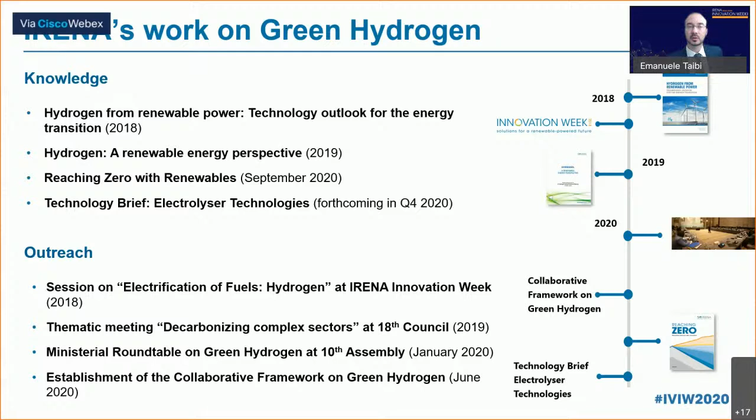From that experience, ministers asked us to continue the dialogue, and because of that we established a collaborative framework on green hydrogen in June 2020. We are now opening this up to participants from the private sector, academia, other partner organizations, and so on, making it a very open platform. This is happening as we speak, and of course it's an ongoing effort. Next slide, please.

Increasingly, the message here is that the closer we get to zero, the more we will need to produce hydrogen derivatives to be able to decarbonize the so-called hard-to-decarbonize sectors. Next slide, please.

Just a quick overview of the challenge in terms of the economics of hydrogen. Today, with some of the best renewable resources, say $40 a megawatt hour, and current cost of electrolysers, in some places we see better prices already today. This is from one year ago: we are still at about $3.50 a kilogram, which doesn't make it competitive with alternatives from fossil fuels.

However, with the cheapest renewable resources we're seeing today, $20 a megawatt hour, and we've seen auctions at 15 and below these days, from $20 and below it starts to get very interesting. So what we need next to really get a strong, compelling economic case for green hydrogen is to reduce the cost of electrolyzers.

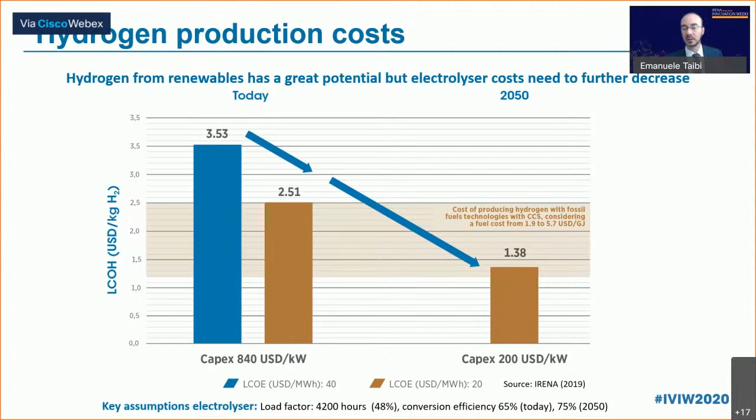Next slide, please. Just to give a bit of perspective on how important electricity price is: in this case we fixed the cost of electrolyzers to a very ambitious target. We're not there yet, but we estimate we might get there in a decade, which is fairly good given the pathway to zero requires hydrogen to come up to speed in the next decade. This is the challenge we're trying to tackle today: how to get from zero to a very significant market in 10 years by 2030.

So in this case you can see that cheap electricity is a prerequisite to getting a competitive hydrogen level. To go below $2, the only chance is to get at least $20 a megawatt hour and below in the price of electricity. So only the biggest, best renewable resources can achieve that.

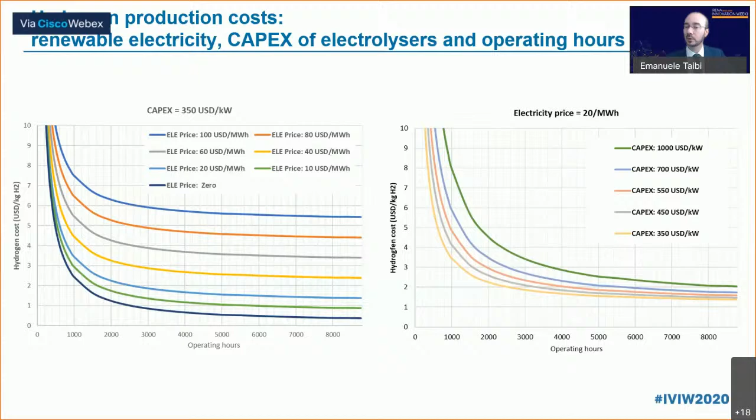Next slide, please. Less sensitive, but assuming we have this $20 a megawatt hour, then what we need to do is further reduce the cost of electrolyzers to get below $2 and well into the territory of blue hydrogen and other alternatives. What you see here is that it's less sensitive than electricity, but equally important to scale up the production of green hydrogen through more affordable electrolysis. Next slide, please.

So this is our forthcoming report on the subject.

For those of you not familiar with electrolyzers, essentially these are machines that can split water into hydrogen and oxygen. Very well established technology, deployed for over a century for different purposes, now producing green hydrogen for energy use.

What we're doing as we speak is tracking projects that went from few kilowatts or hundreds of kilowatts a few years back, with few exceptions, now with announcements moving from hundreds of megawatts to gigawatt scale. We're hearing new announcements every day, and more of these are reaching the gigawatt scale.

So what we need to do in parallel is get R&D to give us the next generation of electrolyzers while we scale up what we have today, which is already quite good. You will hear from our excellent panel to discuss that in a minute.

Two key points: I think trade-offs are very important. Durability, efficiency, and cost have a trade-off. If you make it more durable, you might end up making the electrolyzer less efficient. Overall, you need to balance this to get the minimum cost of hydrogen, which is the objective.

Of course, an electrolyzer can be looked at from the perspective of a cell or a plant. When we look at a plant, there is more than just the electrolyzer stack inside — there's much more. Our panel will talk about it, but I'll also have one slide about this.

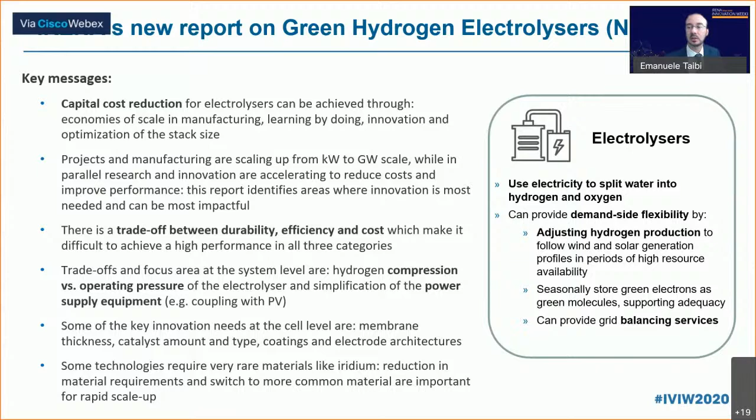Next slide, please. So this is, in brief, a very simplified view of an electrolysis plant.

You have the stack, you have electricity from renewables coming in, you need a transformer, you need a rectifier, and then out of the stack you get the hydrogen and the oxygen, and you need to compress it and clean it and feed it into either a pipeline, storage tank, trailers, or ships. It really depends. And of course you need feed water supply.

This is not an issue where there is even seawater. Even if we consider desalination, it's not a major expense, yet it has to be a significant volume of water accessed to be able to produce hydrogen at scale. The cost is about 50-50 between the balance of plant and stack components, with different potential for cost reduction.

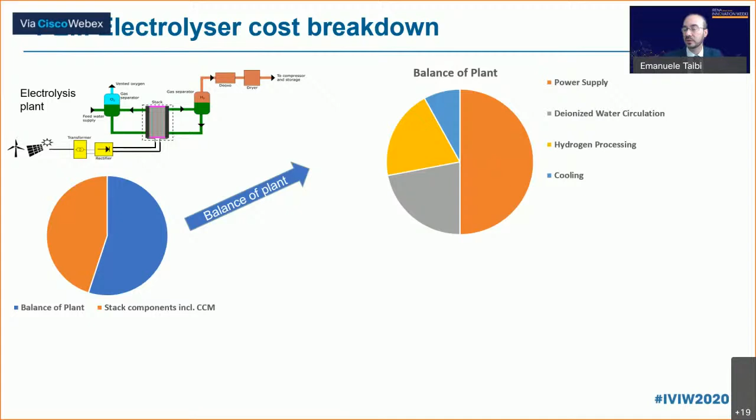Next, please. So the balance of plant — there is significant scope for reducing the cost of power supply. This is power electronics, and we've seen a dramatic reduction for solar PV. We will probably see the same here.

Next, please. The core of the plant is the cell stack, and this is where it gets quite technical on electrochemistry. Important to note, we have several components, and parts like bipolar plates, which are not very well known outside of the industry, take a significant part of the cost.

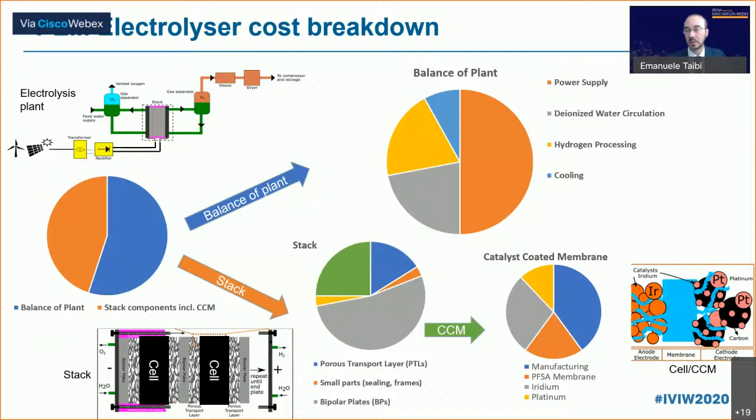Next, please. Then the very core, the catalyst-coated membrane, is where we see materials like iridium and platinum — here I'm talking about PEM, just as a practical example. This is where the rare materials are typically situated, and where some potential cost reduction can be tackled, but this is yet 25% of the stack, and about 10% of the total of the plant. Next, please.

So let me conclude with what I mentioned at the very beginning. We established a collaborative framework on green hydrogen based on the call at the 10th assembly from our members to continue the dialogue between public and private sector. We have an excellent dialogue set up for today as well. The idea is that this is very much appreciated by governments to get insights and views and perspectives from the private sector on how to scale up, and at the same time suggestions on how to make policies and regulations align with the objectives we are seeing coming up in more and more hydrogen policies around the world.

We have a few elements that have been identified as priority: the knowledge sharing, collaboration with hydrogen initiatives, and we're very pleased to collaborate for the time being already with IPHE and the Hydrogen Council, which respectively would be moderating the next session, and they are partners for the session and the next keynote today. The nexus between hydrogen and renewables is clearly IRENA's mandate, and of course, knowledge about all steps of getting hydrogen from production to consumption are very important, as well as standards and regulatory framework and best practices.

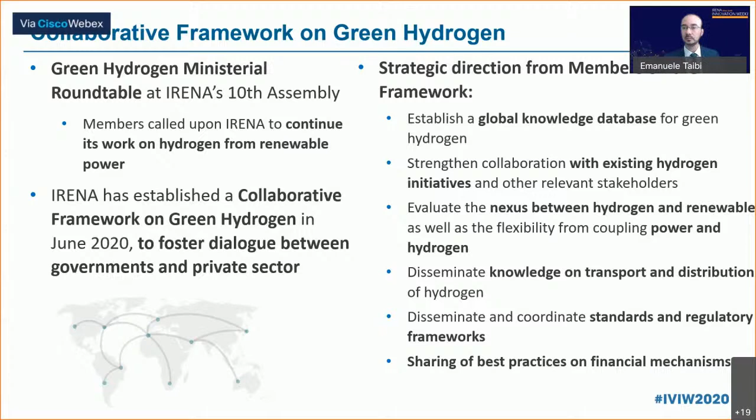Thank you very much, Emanuele. I thought that was very clear, and I hope people got a good sense of the topics that we are talking about here today, in particular the critical importance of driving down the cost of electrolyzers as part of driving down the cost of green hydrogen production. So we are going to dive into that topic in our next panel. We have an excellent lineup of speakers who, between them, have a wide range of expertise on the topic.

This next panel is called Electrolysers Production. It's moderated by Tim Carlson. Tim is Executive Director of the International Partnership for the Hydrogen Economy, IPHE. So Tim, can I hand over to you, and can I ask all the panelists to please turn on their cameras, and Tim will introduce you. Tim, over to you.

That's great. Thank you very much, Paul. As Paul said, I'm the Executive Director of the International Partnership for Hydrogen and Fuel Cells in the Economy, the IPHE Secretariat, and it's my pleasure to moderate the panel on electrolysis for green hydrogen production. As Paul suggested, please send in questions via the chat or the Q&A panel, and hopefully we'll have time to address some of those questions. I'm going to provide a brief bio introduction. I understand the material is also available on the site, and then we'll walk through each of the presentations and then do Q&As at the end.

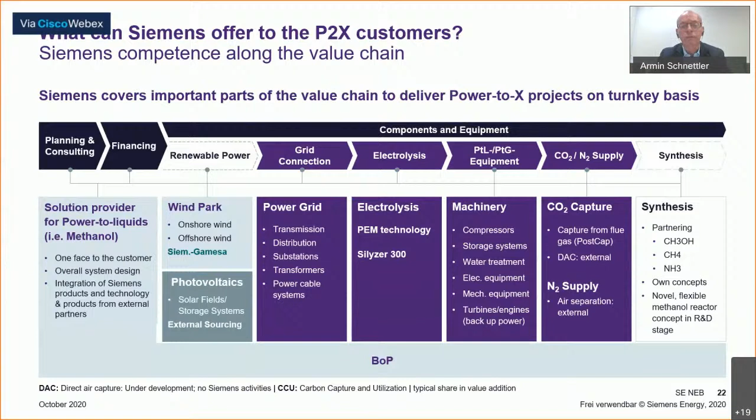In the later sessions, we will talk about ammonia, and then we have, of course, the next stage, right? How to supply the nitrogen, how to supply maybe the CO2 and get the carbon monoxide out of that, and then the synthesis. So we partner for that. We are quite strong in the center here, and this is really where our focus of our business is. Maybe last slide.

Two parts why we believe, and our customers believe as well, why we are a valuable partner. This is maybe the sales pitch, right? Necessarily required here. We have right from the beginning focused on industrial scale electrolyzer systems and plants. Although there is not really a standard in the market, we get requests for, say, 10 and 5 and 15 and 20 and 50 and 150 megawatt ranges.

We need to be careful that we do not over-engineer everything and reinvent the wheel all the time. So what we are doing is we have pre-engineered and prefabricated packages. And if you would like to get, say, 100 megawatt, then it is 2 times 50, because 50 megawatt is pre-engineered. We have the basic engineering, etc. And the next one, of course, the gigawatt range is somehow different. Of course, then we do it in a slightly different way.

So this is important. And the final topic I would like to mention here before stopping is, in order to reduce the overall cost over, say, 10, 15, 20, and 25 and more years of operation, you need to have a digital twin of the electrolyzer, of the system, in order to operate the overall plant, depending on the input factors, which is, of course, availability of low electricity prices, the expected output in, say, hydrogen demand in tons at the given expected price or cost, and, of course, maintenance and service intervals you need to consider here, because availability is key.

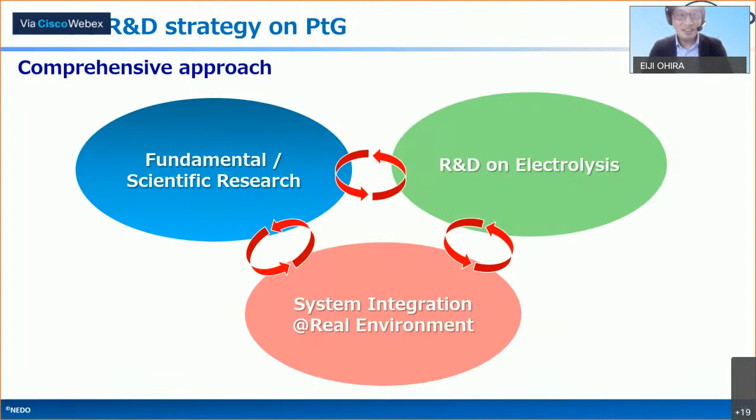Okay. This is an approach. The fundamental research is to understand what is inside the reaction of the electrolysis. We did several approaches: electrode-electrolyte interface analysis, bubble behavior observation, accelerated degradation protocol, and reverse current behavior analysis should be important for us. We integrated this kind of analysis technology to develop a platform to understand the electrolysis itself, and we feed back this information to the material or CCM development.

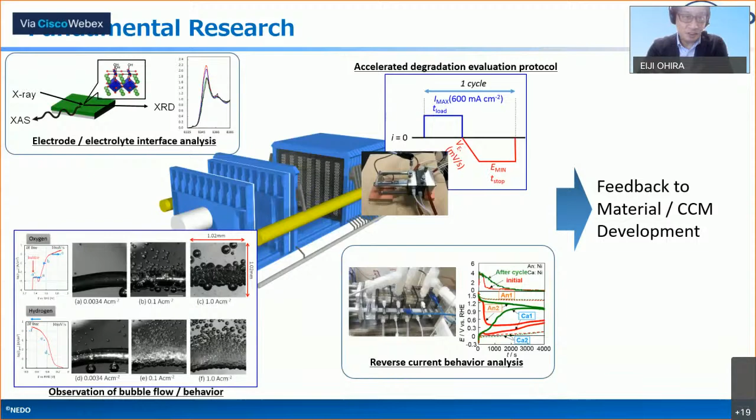This is our approach for developing the electrolysis technology. Now we are focusing on alkaline electrolysis and PEM electrolysis in the short term. The top slide shows the Asahi Kasei large-scale alkaline electrolysis, 3 square meters wide and 1 stack. In the right graph, the top blue line is input from the wind turbine, and the bottom red graph shows the cell voltage of the alkaline electrolysis. You may see good load following and good response even in alkaline electrolysis. So we decided to utilize this alkaline electrolysis in power-to-gas systems.

The bottom photo shows our new technology, a hydrocarbon membrane for electrolysis developed by Toray Corporation. In the middle graph, you may see good performance compared to Nafion as current PEM membranes. After the 25 kilowatt test, we are going to move to scaling up this technology.

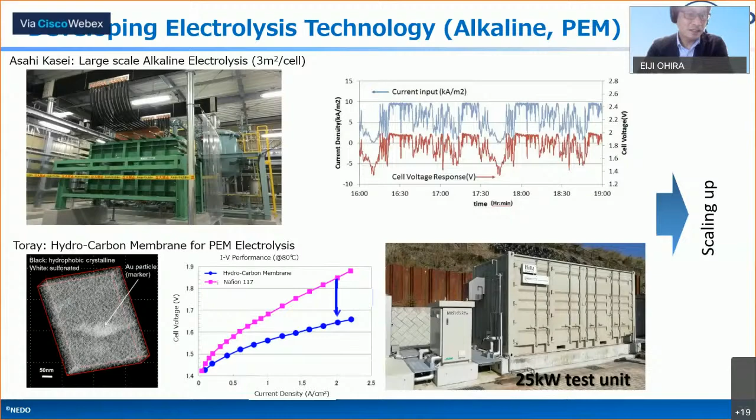Now NEDO has been conducting two types of large megawatt-class power-to-gas projects. First, we started the kilowatt class around 2015, and after closing that project, we moved to the megawatt class. The left figure shows our power-to-gas project in Fukushima Prefecture. We introduced 10 megawatt alkaline water electrolysis with 20 megawatt PV. We try to produce green hydrogen and also provide grid balancing with the dynamic operation of the water electrolysis.

Our first plant was to provide green hydrogen to the Tokyo Olympic Games this year, but unfortunately it's postponed to 2021. Maybe I'm happy to introduce this technology for next year's Tokyo Games. Later on, we also developed a 1.5 megawatt PEM water electrolysis power-to-gas plant, and we utilize large-scale metal hydride hydrogen storage combined with compressed hydrogen storage.

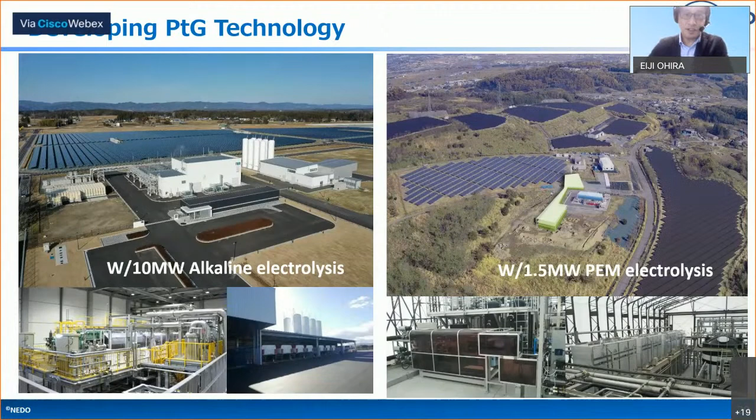But we recognize there are a lot of challenges to realize power-to-gas with electrolysis technologies. We need to improve the electrolysis technology itself. Japan has cost and efficiency targets for 2030. We need to improve efficiency and durability under dynamic operation conditions, which are very close to power-to-gas conditions, and performance: hot and cold start, ramp rate, response speed. Scaling up should be important. Next-step novel materials to reduce the cost or increase efficiency should be required.

Power-to-gas is a developing system technology. Japan tries to commercialize this system by around 2030. We think about total system optimization, including the balance of plant. We also developed energy management technologies based on data for weather forecasts and market conditions, etc. Operation and maintenance cost is a big part of the hydrogen cost, and we try to reduce it. Most important is the business model and market mechanisms. We didn't have any market model in Japan, so we try to develop this kind of model.

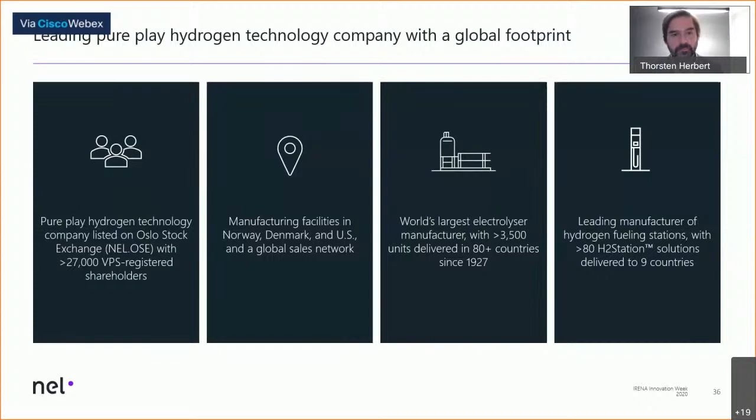Looking into the manufacturing facilities and also pointing out one very interesting fact: if you look at the PEM electrolysers, we are now in the US at 40 megawatts per year capacity. But the highlight, and I will dive a bit deeper into that in one of the later slides, is that we are now preparing the plant in Norway for an output of 500 megawatts per year by end of next year. So this is currently in process.

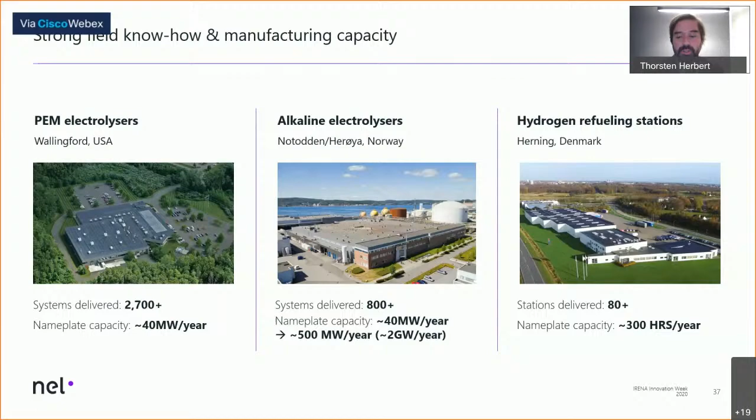And also a very good perspective is that this location, which we also see in the picture, is already capable of being expanded to 2 gigawatts per year just by quadrupling the equipment. And then the refueling stations in Denmark, we are ready to build up to 300 stations a year. Next slide. So, 2 latest developments.

Again, one highlight for us, and that also leads me to a comment on one of the earlier presentations, the introduction of Emanuele, looking at the scenario with $350 per kilowatt, with the perspective to have this huge capacity and fully automated manufacturing principles in place soon. In our latest deal, we already sold our alkaline technology in this price range.

So if we anticipate what we can gain from this upscaling in manufacturing capacity, we are already there. As I said, this will start test production mid next year and will be ready for the whole capacity end of next year. And just by multiplying the lines, we would be able at this location to ramp up to 2 gigawatts per year. Next slide.

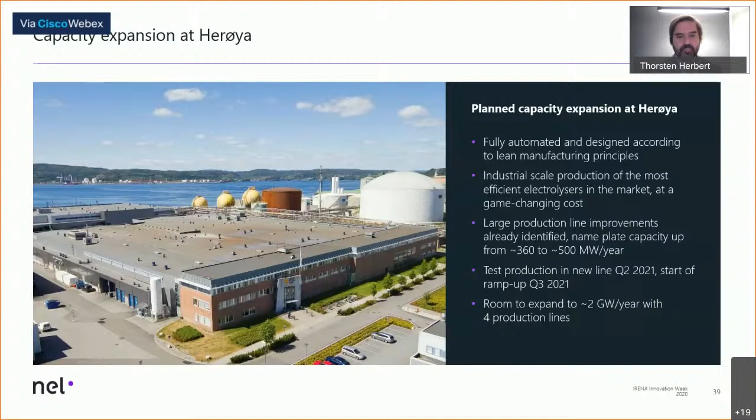Looking into the technology, we lately got some key R&D grants, 2 quite large ones for our R&D activities, addressing both technologies we are offering. On the one side, the alkaline electrolyzer: we have an R&D grant here in Norway for improving the next-gen alkaline electrolyzer, also at pressure.

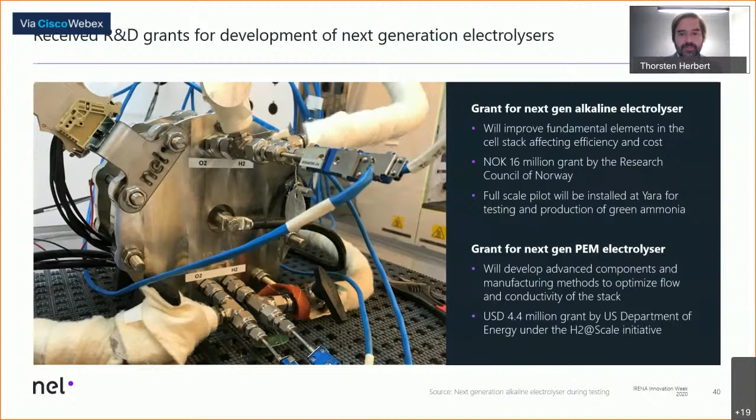And then on the US side, a quite significant grant to further develop our PEM technology with regards to components, manufacturing methods, but also optimizing flow and conductivity of the stack. Next slide and next slide.

Quickly looking into the European momentum. I think you're all aware that at the beginning of July, the European Commission came up with this very ambitious strategy. We are talking 40 gigawatts installed electrolysis capacity in 2030, but already 6 gigawatts in 2024.

And this is one of the messages I want to bring across: this should be our main target. We should, in Europe now, really focus on these 6 gigawatts in 2024 and come up with a roadmap. What we need to do, what we need with regards to policy measures, and looking into the next slide.

We already see not only on the Commission side with the 40 gigawatts target, but also ambitious targets of the member states. But still here we are roughly at half of this 40 gigawatts, what the member states pledged so far.

One other thing before I come to the end is that obviously, and I put the logos here, we already have funding mechanisms in place to come to this milestone of 6 gigawatts by 2024. But I think the key, and this is here in my subtitle, the key now is really that we as an industry cooperate, that we coordinate each other to, in the most efficient way, utilize these funding schemes and also address the additional needs we have.

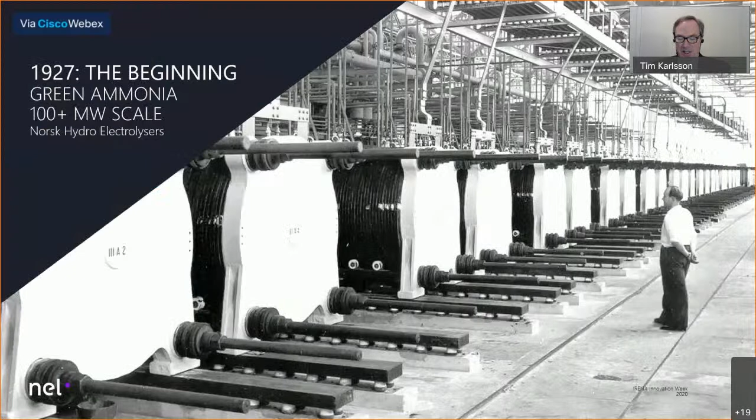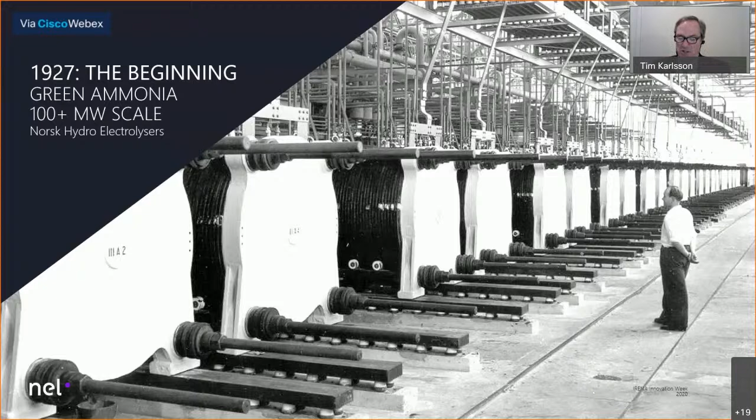I'd like to move on then to our next presenter, and that is Denis Thomas. Denis is leading the business development group of the activities for water electrolysis at Cummins, which acquired the activities of Hydrogenics in 2019. Denis represents Cummins in several EU associations, including Hydrogen Europe and Wind Europe and other organizations that are looking to hydrogen to play a significant role. He is also a mainstay in hydrogen-related policy discussions across Europe. So, Denis, please, you have the floor.

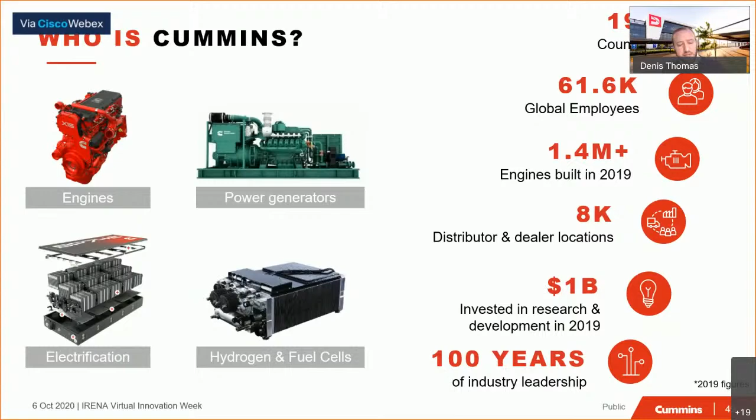The activities of Cummins in the field of hydrogen are quite wide. We have technologies in the field of electrolysis; I will present them in a minute. We also have technologies in fuel cells and in hydrogen storage tanks. The idea is to be able to offer complete systems, both on the electrolyzer side and on the fuel cell powertrains for mobility.

Among those acquisitions, there was the acquisition of Hydrogenics, which was the major one, including electrolysis and PEM fuel cells. There was also, a couple of years ago, the acquisition of the solid oxide fuel cells of General Electric. And then there is a joint venture with NPROXX in Germany on hydrogen storage tanks. The aim is really to be a top performer in industrial hydrogen generation, but also in power to X, and I think that's the focus of today's discussion. On the mobility side, our focus is mainly on heavy duty mobility, like trucks, trains, buses, etc. Next slide, please.

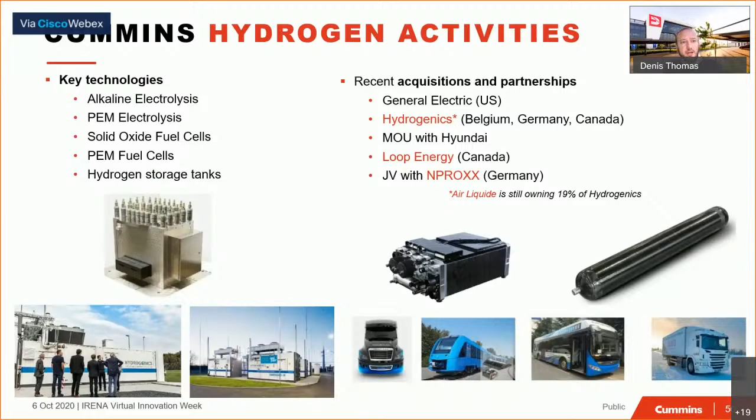On the PEM technology, which is really the focus of my presentation today, we've been developing this technology for over the last 10-15 years. We have already commercial products at 2.5 megawatts, which are containerized systems. We are currently developing our product towards 5 megawatts and bigger. In this case, we will not follow the containerized turnkey approach, because we believe that for a bigger project there is a need to integrate these technologies into much more complex systems. So we are partnering with a lot of EPC companies, because we think they can bring a lot of value, know-how, and cost savings at large-scale.

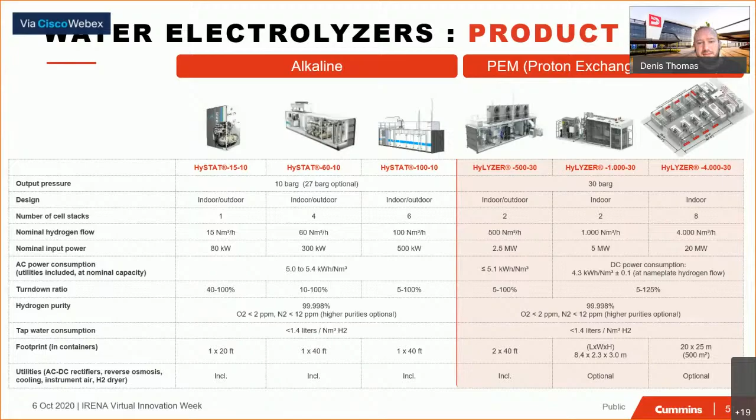Obviously, the building block that we use for the PEM technology is a PEM cell stack with cells with a surface area of 1,500 square centimeters. What you see here is a 1.25 megawatt cell stack, which can also operate up to 1.5 megawatts. That's the building block of the current commercial product.

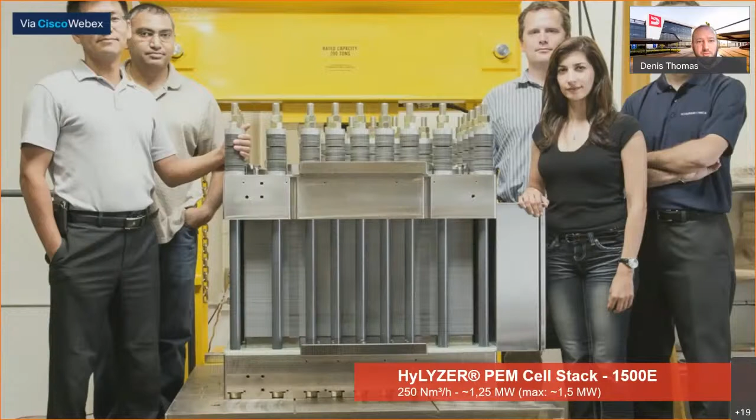Next slide, please. Using that building block, this is the type of systems we can deliver today on a commercial basis, between 1 megawatt and 2.5 megawatts, by just playing with the number of stacks used in that system. Obviously, one important word when we speak about cost reduction is standardization. That's something we are developing right now, to make sure we use standard platforms that will allow us to reduce cost on the long term by getting into large volumes.

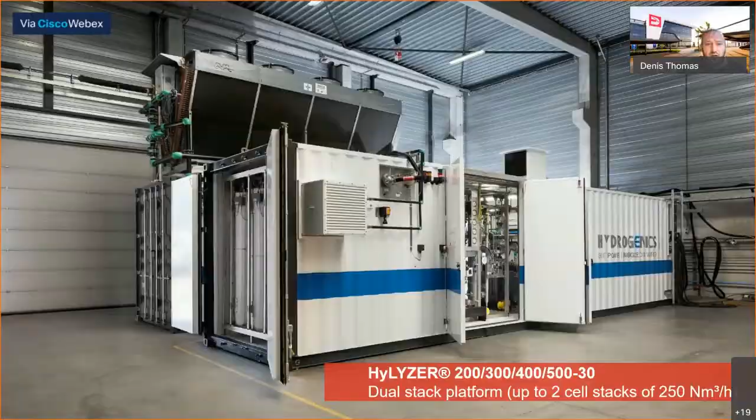Next slide, please. Concerning this technology, it has already been deployed in a number of sites. We have more than 15 projects in the megawatt scale range for various types of application and in various geographies. You see some of those pictures here.

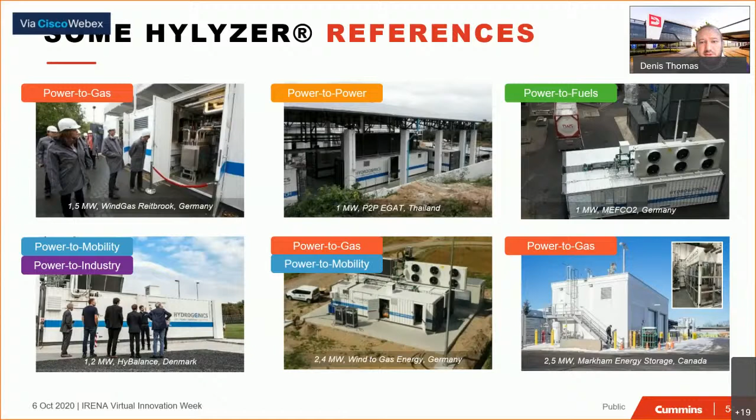Next slide, please. Concerning current development, we are upscaling our building block. So the 1.25 megawatt cell stack, we are doubling its capacity by doubling the amount of cells. Obviously, by doing that, you don't double the cost. Our general philosophy at Cummins is bigger is cheaper, and that's what we will follow also on what we call the balance of stack and balance of plant. By doing that iteration, we have a building block of 2.5 megawatts, which is interesting for megawatt-scale type of projects.

We are also at the very initial phase of the learning curve on PEM technology, so we still see a large potential for cost reduction with this technology. Concerning efficiency, I've presented in the table of products the numbers of efficiency, and I think this was also related to some of the questions in the chat - how do you compare efficiencies. I think it is really important that each time you mention this, you refer to what you're actually discussing in terms of scope of supply.

Concerning the PEM technology, it is very suited to connect directly with wind or solar energy, because it has the ability to react very fast to dynamic operation in terms of seconds, with a very wide operating window. It is also very compact, and has a lot of benefits in terms of maintenance, especially because we don't use KOH, which is the case for alkaline technologies. Finally, with this technology, we can deliver systems with a 30 bar output pressure, which is quite interesting when you want to make power to gas systems, or if you want to inject the hydrogen into industrial processes.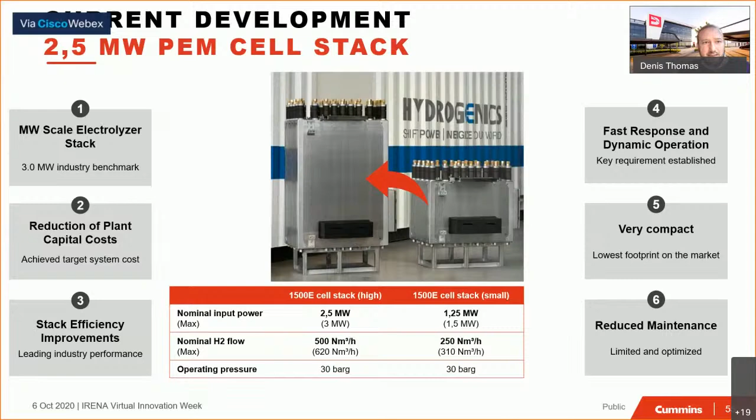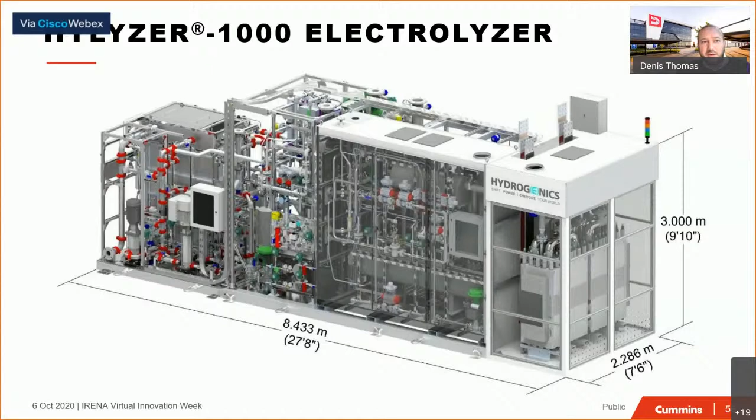Next slide, please. Using this 2.5 megawatt building block, we have developed today this product, which is the HyLYZER 1000. That's a 5 megawatt product integrating 2 stacks of 2.5 megawatts. What you see here is really the standard and modular solution we offer today, including all the heat exchanger, the water polishing system, the gas liquid separators. It is an indoor system, but to also allow safe operation, we have enclosed all the sensitive areas where there is hydrogen generation.

This product is currently being deployed in a project in Canada together with Air Liquide in a 20 megawatt setup. You see here on the right side, this 20 megawatt project is made out of 4 systems of 5 megawatts each, connected to one rectifier. That's typically the type of scope of supply that we would see for Cummins in the future.

All the rest of the plant, meaning the water purification system, the cooling of the systems, and all the medium voltage, can be done by a local EPC, which can lower the cost of the complete system. Our focus is to make sure that the red items, we can deliver at the lowest cost, but also guaranteeing all the safety and quality requirements of those systems.

This project in Canada is actually in the phase of commissioning. And obviously, as soon as it will be up and running completely under commercial conditions, there will be quite a lot of communication from our side.

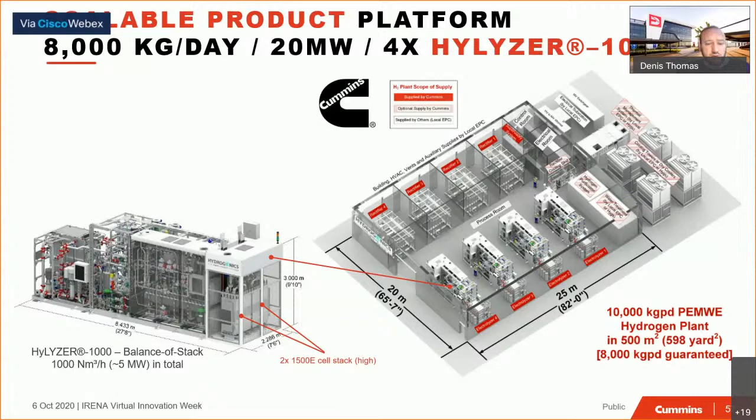So to conclude, what I want you to remember is that bigger is cheaper. We are today validating this 20 megawatt project, which will be the basis for projects up to 100 megawatts. But if we want to be able to deliver gigawatts, we will need a next iteration into our products. For us, it will go through bigger stacks, even more than the 2.5 megawatts, also bigger systems, having more stacks sharing the same balance of stack, and standardization and partnering with EPC companies. Thank you for your attention.

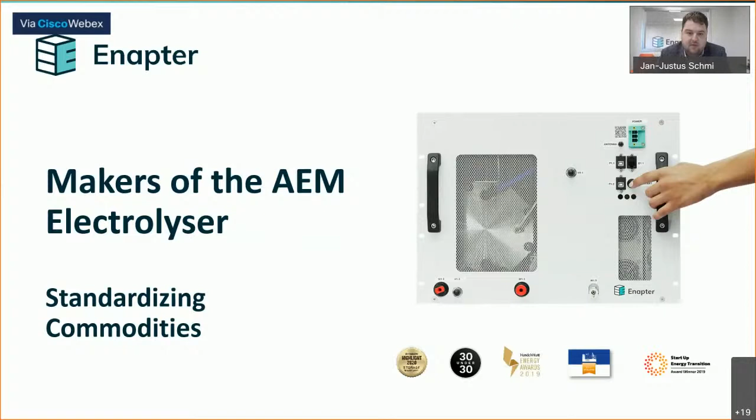At the core, Enapter is an R&D company. Our origins lie with a catalyst development team that was working on non-PGM catalysts, which developed the foundation of our electrolyzer technology. Today we continue to strongly invest into this path and develop our electrolyzer technology. It's really fun to work at Enapter because our AEM electrolyzer technology is quite young compared to the traditional alkaline and PEM technologies, so we still see a lot of untapped potential to further improve it.

On this slide, you can see our current product, the EL 2.1, and we're really proud of this machine. It's been iteratively developed over the last 2 years, and this machine is now significantly more compact, more efficient, and lower cost than all its predecessors. We think it has a very strong position in the market with regard to energy efficiency and cost for this type of size of unit.

Each EL 2.1 produces 500 normal liters of hydrogen gas per hour, already pressurized at 35 bar. And multiple units of these can just be stacked together to reach any desired production rate that is needed for a project.

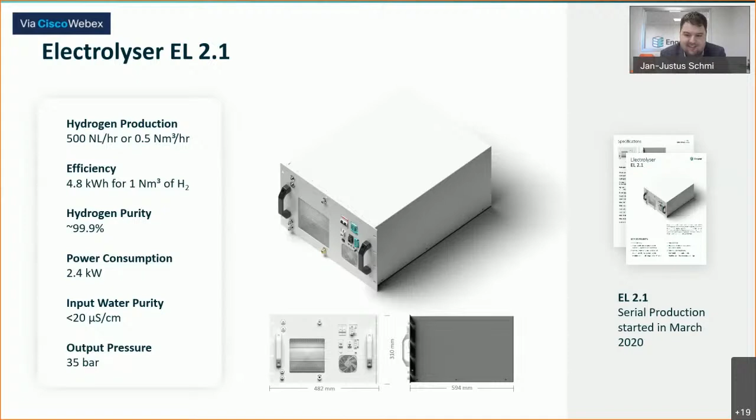So why is it that we are building such a relatively small building block, and why can we do this cost effectively? The answer lies in our patented AEM technology.

Essentially, the way that the anion exchange membrane electrolyzer works is quite similar to the PEM, but due to the fact that we are working in a slightly alkaline environment, we do not rely on high cost materials. So especially remembering Emanuele's introduction about bipolar plates, we do not need titanium for this, we can just use normal steel. This is probably an even bigger cost saving than not having to rely on PGM metals. So we don't need iridium, we don't need platinum, but the biggest cost saving is that we don't need titanium, and we can actually build our stack from very low cost materials.

Then the next feature is the operation of the cell. We are circulating our liquid electrolyte only on the anode, and operating with a differential pressure. That means that on the balance of plant side, for the water circuit, all we need is a tank and a pump, circulating the water through the anode. At atmospheric pressure, we can use plastic components, very low cost. Whereas on the hydrogen side, we are producing hydrogen under pressure, and due to the operation with a dry cathode, we are getting highly pure, directly compressed hydrogen straight from the stack. So that means we have both a low-cost stack and a low-cost, very simple balance of plant, and this is the prerequisite for being able to make a small building block that can be mass-produced.

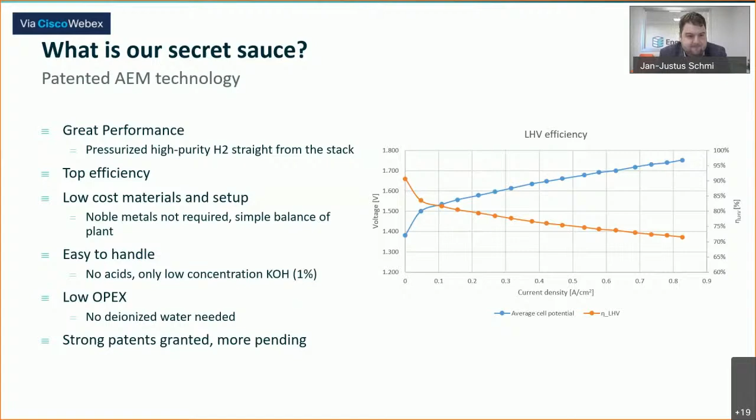So I've mentioned it in the beginning, we are scaling in a very different way. Rather than building very large individual units, we are building small units that we want to mass produce. You can draw an analogy to PV panels, or also to the IT industry. In the 1980s, computers were getting bigger and bigger, filling up entire floors and skyscrapers just for one company. These mainframes don't exist anymore. Nowadays, all servers and large computing centers are built up from modular blade computers stacked together, based on PC architecture that replaced these giant machines with modular small commodity items. So our electrolyzer is the PC of the hydrogen industry.

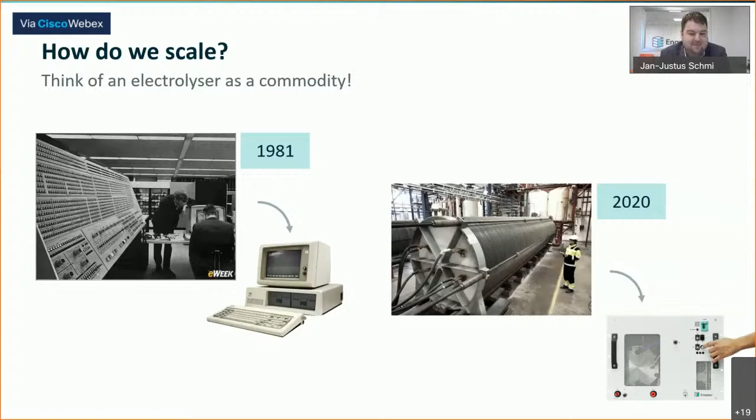This is where we are at with our development. When we started in 2017 until today, we have almost halved the price of our electrolyzer, keeping the size and production rate the same. We are aiming to release a new version of our product every year, making each individual building block smaller, more efficient, and lower cost. So by the time our mass production facility is up and running, we think the cost of our electrolyzers from today will be just 20% of what it costs today.

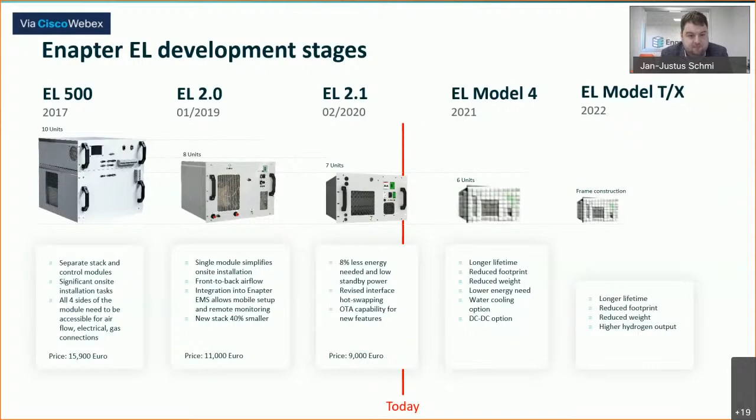Stackability is extremely important. Whereas each individual unit we want to make as compact as possible, we then have to stack them together to make them very easy to use for any kind of application. Today, most of our customers put our electrolyzers in cabinets, such as the ones on the left. We are now working on building the first container, which has roughly 150 kilowatts, just made up of stacking EL 2.1s together. The other project we are working on right now is the AEM multi-core. When looking at large-scale systems, we can benefit both from the cost reductions of the mass-produced electrolyzer building block, as well as the typical cost reductions that come with centralizing components that don't scale with unit numbers, so we can centralize the balance of plant for the megawatt scale system.

And just put in hundreds of our stack modules, and that can easily be stacked to the right number to the production rate that's needed. And with this kind of system, we will have extremely high reliability. We will have extremely flexible control because each string of modules can be individually controlled. And on the balance of plant, we will have very significant cost savings.

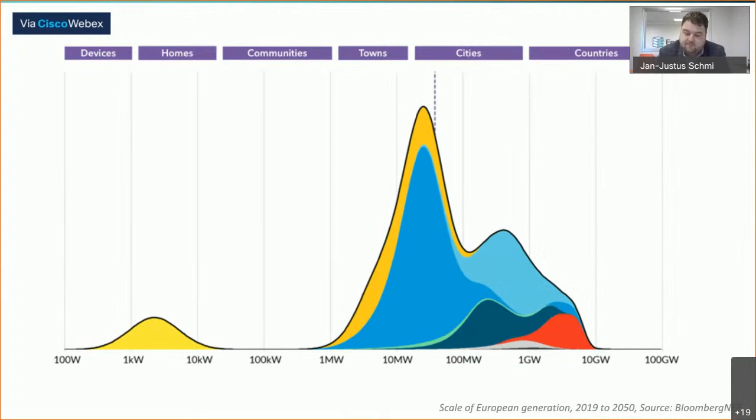The solar panel has disrupted the electricity world and has made energy consumers into prosumers. And we think that decentralized hydrogen, click one more time, please. And we think that with our modular decentralized electrolyzers, the same can be done to fossil fuels.

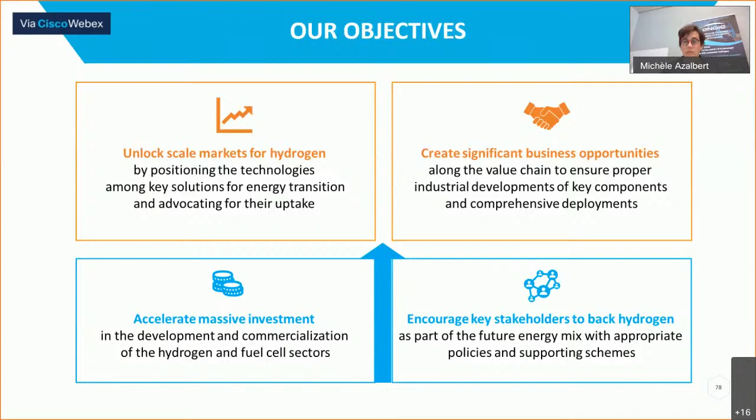Third, provide recommendations and encourage key stakeholders such as policymakers, the business community, and also international agencies and civil society to increase their backing of renewable and low carbon hydrogen as part of the future energy mix with appropriate policies and supporting schemes. And lastly, advocate for the important role of renewable and low carbon hydrogen technologies in helping to meet climate goals, energy security and competitive targets. Next slide.

Our vision is that hydrogen has a key role to play in the energy transition, and based on an in-depth analysis of real data, industry data, we estimate that cost will sharply fall by 2030, thanks to the scale-up, making hydrogen a competitive low-carbon solution for 22 applications and addressing 15% of global energy demand. By 2050, hydrogen reaches its full potential, delivering 6 gigatons of CO2 abatement annually and 30 million jobs.

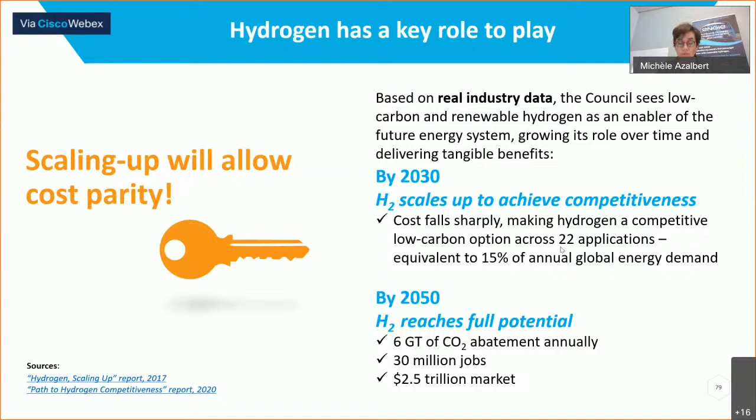So the second part of my presentation is to share with you what potential we see for e-fuels and more specifically for ammonia. So ammonia is today mainly used for fertilizer production. It's a first activable segment where the competitiveness gap between renewable hydrogen-based ammonia and fossil gas-based ammonia is the lowest. So it's a low-hanging fruit in terms of decarbonation. It also does not require changing the process of production of the ammonia, which consists in capturing nitrogen and combining it with H2 through the Haber-Bosch process.

Today, some figures: half of the 70 million tons of hydrogen produced on an annual basis is used as a feedstock for the production of fertilizer, mainly for the production of ammonia, and the rest is used by refineries for the production of biofuels and methanol and also other processes. So today, ammonia is a significant market on its own, and it will continue to grow at a rate of around 2 to 3% per annum, according to the experts.

Most of the ammonia produced is used for fertilizer production, around 80 to 90%. And the remainder is used for the production of explosives and also other chemicals like refrigerant, cleanser, textile, resins, and so on. Next slide, please. Maybe just in a few seconds.

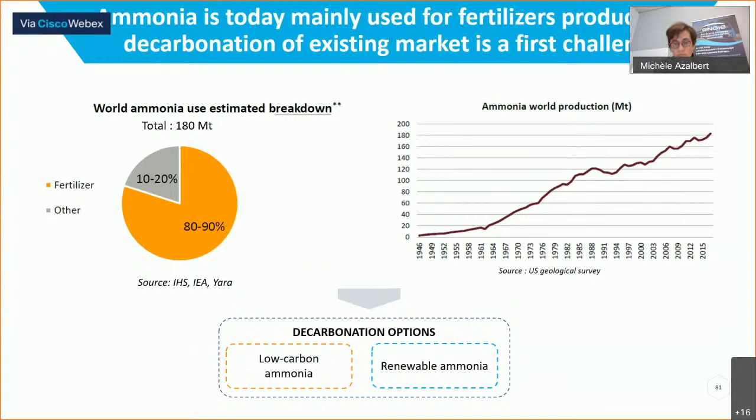Next slide. So beyond just ammonia, e-fuels will contribute to decarbonize mobility and especially heavy-duty mobility. Why so? Because batteries are not today the solution, mainly for autonomy and weight reasons. E-fuels entail a wide range of zero carbon or low carbon fuels, like gaseous H2, liquid H2, synthetic gas, renewable ammonia, e-methanol, e-LNG, and also e-kerosene. And they address different types of heavy-duty mobility: road mobility, shipping, aviation, and rail.

To note today that within existing port facilities, within 120 ports, you already have ammonia trading facilities. So you can have direct access to that. In addition to the potential of the fertilizer market, taking into account the potential of the heavy-duty mobility market, some experts consider that ammonia production could increase by 30% for the shipping market, which represents 150 million tons per annum. And it could also develop for energy uses, leading to an ammonia market of 430 million tons in the long run. This is to say 2.4 times more compared to what it is today.

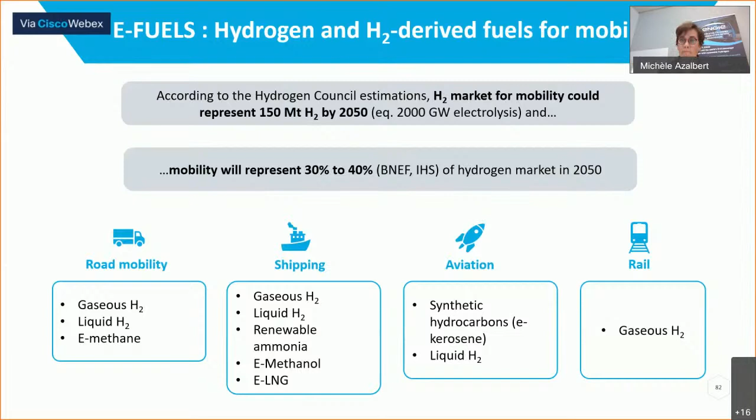In the long run, we will export renewable resources from countries having massive excess of renewable energies to countries that will not have enough to meet their domestic demand. And today, there are different options available.

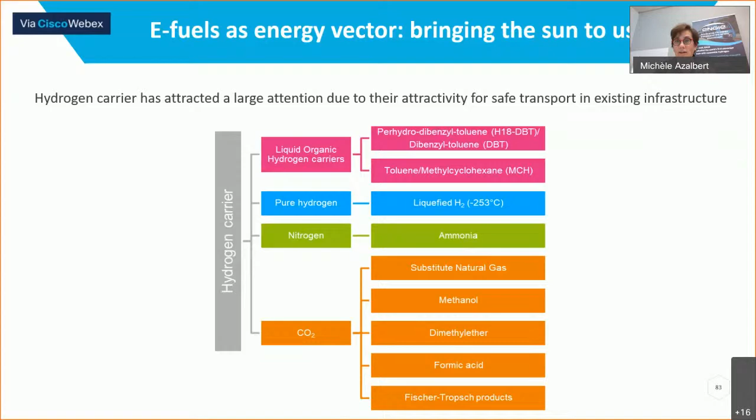As an energy vector, hydrogen can be transported over long distances through liquefied hydrogen or different forms of hydrogen carriers, such as ammonia again, methanol, formic acid, synthetic natural gas, or liquid organic hydrogen carriers. And some of them, such as synthetic gas or ammonia, can rely on existing infrastructures. Next slide, please.

So maybe a few words about a concrete project we have today in the portfolio within ENGIE. One example around e-methanol. The purpose of this project, which is already developed for the first step with a design already achieved, is the production of e-methanol in the north of the Netherlands, in the Groningen region, on our plant in Groningen, Eemshaven.

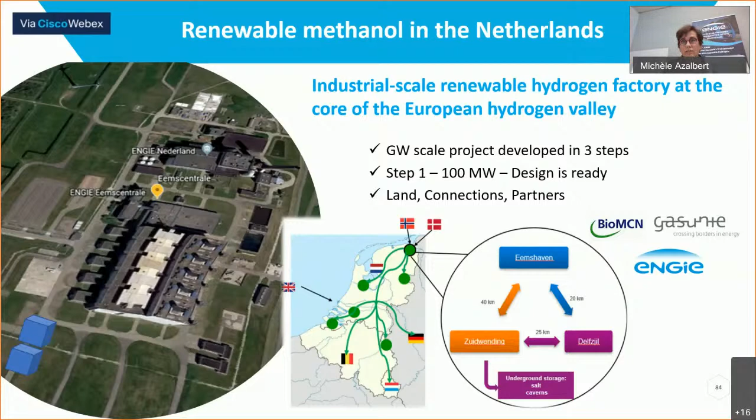This is an industrial scale project developed in 3 phases, and the first one is about 100 megawatts. The product will be first used in the chemical area nearby. But this project is at the core of the European Hydrogen Valley, and then it can distribute renewable hydrogen in the nearby countries. A second project, next slide, please, about ammonia.

It's again an industrial scale ammonia production project based on renewable hydrogen and dedicated in the first step to fertilizer production of zero carbon ammonia. Again, it's a project in gigawatt scale developed in 3 phases and starting with a double-digit phase. Again, the design is ready, and we have developed it together with Yara in Australia. And it's exactly what has been said in the previous panel session.

It's about finding the right optimized design, whereby you minimize the total capex of the solution, capital expenditures, linked be it to the production of renewable, to the storage of renewable electricity, to the storage of hydrogen, and also to the distribution of hydrogen. At the end of the day, it's to find the right design that will lower the cost of the total solution, but also will provide a reliable solution.

And it's also about flexibilizing the downstream process of Yara, extracting some flexibility in order to reduce the total cost of the solution. And lastly, as said previously, it's about energy management in order to optimize any excess of renewable energy or any shortfall of renewable energy. So it's all about that.

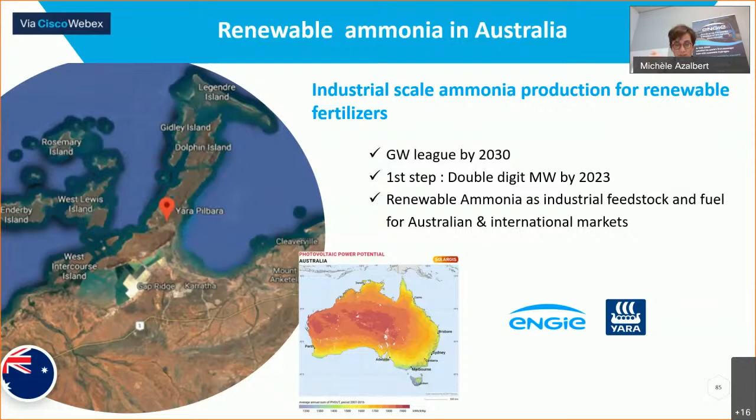So it's about integration, but it's also about development and establishing the business case, whereby you not only have the long-term offtake, you not only have the technical solution, but you also have the subsidies that will help the project to take investment decision right now, because compared to the fossil product, the product is more costly. Next slide, please.

So there is today a scientific consensus on the reduction of renewable H2 production cost. And renewable H2 should be competitive with grey hydrogen by 2030 in the best geographies. However, green H2 production comes at a higher initial cost than its fossil equivalent. So we face this competitiveness gap compared to the alternative fossil solution.

So we need today a supporting scheme in order to trigger this cost decrease and to bridge the competitiveness gap in the early years. So we believe within the Hydrogen Council that we need policies to support the takeoff of renewable hydrogen, and that they rely on 3 main pillars. The first one is on the supply side, to provide subsidies or set up contract for difference mechanisms to offset on a temporary basis this competitiveness gap.

The second pillar is on the demand side, to set short-term and medium-term quantified targets for industry and transport, and to stimulate the demand via public tenders. And the last pillar is about developing a roadmap of decarbonization of the energy system, followed by concrete action, such as implementing a traceability system like guarantee of origin, distinguishing renewable hydrogen from low-carbon hydrogen to give chances to the two products in parallel, and also implementing storage obligation because the system will require this kind of flexibility solution.

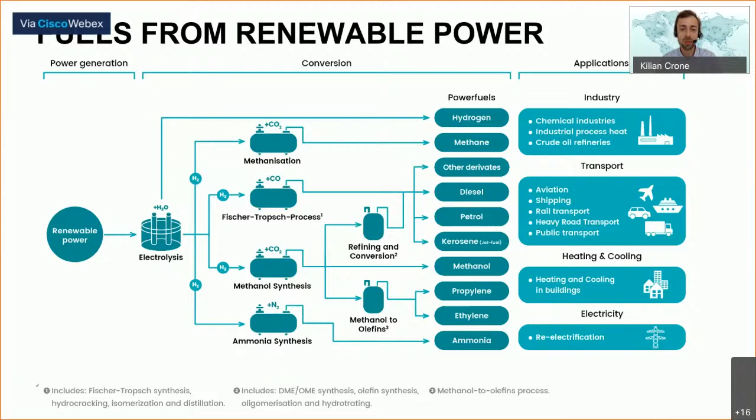I brought with me a bit more detail for the next slide, if you could switch please. We ran a study, about to be published, on a 100% renewable energy system in 2050. Many of you will say, okay, 100% renewable in 2050—is this really necessary or realistic? It's a bit of an exploratory scenario where we trace what being in line with the Paris Agreement would mean for the transition of the global energy system.

What we find is, unsurprisingly, a declining overall fuel demand due to heavy electrification as much as possible across sectors, especially transport. But we also see there will be significant global demand for electricity-based fuels. On the left you see bio, fossil and synthetic, or e-fuel, global demand combined. On the right you see the synthetic global demand, and the 2050 bar isn't much different for both.

That means with zero fossil fuels, and all the biofuels we can sustainably produce, the rest will have to be filled by electricity-based fuels. There we see a whole bunch of fuels: methanol, ammonia, liquid hydrocarbons, methane, and hydrogen. Hydrogen is one of them, but methane plays a role in parts of the heating sector and some remaining applications, liquid hydrocarbons in aviation and marine predominantly, and methanol and ammonia predominantly as base chemicals replacing current petrochemical production. So we see exponential growth if we're really serious about a 100% renewable energy system.

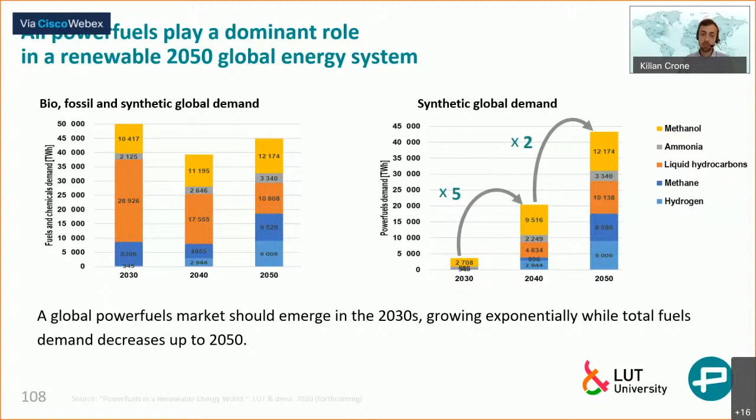On the next slide we also analyzed what that would mean for global trade. Yesterday I was on a panel discussion and some speakers said hydrogen would be the new oil. But for it to actually become the new oil, the key component we're lacking is tradability. Tradability works best with liquids—it does work with hydrogen to some extent, but it's just way more complicated. We analyzed in this same forthcoming study who would actually trade, why, and how much.

We see that especially Europe stands to benefit strongly from importing liquid power fuels from other world regions with lower levelized costs of production, while other regions—especially Sub-Saharan Africa and South America—could benefit as main exporters. That's not surprising looking at levelized cost, but it's maybe more surprising that other world regions have less of an incentive to do so.

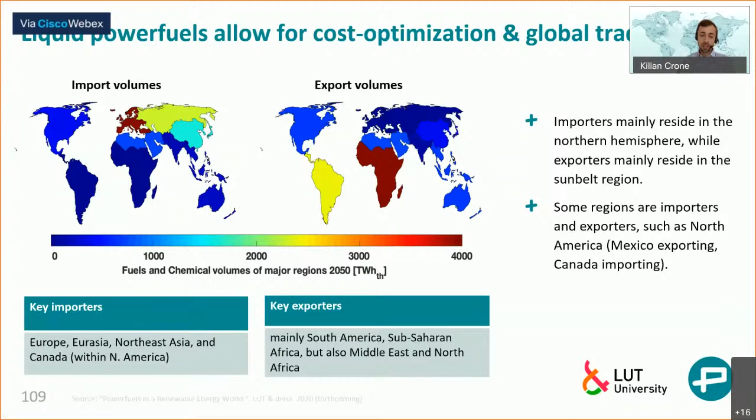I think we've heard in the previous session that hydrogen electrolyzer technologies stand ready to be scaled at industrialized scale. And I can say for most of the other synthesis steps that I just presented to you, they are commercially available, sometimes since decades or centuries, to be bought from equipment manufacturers. So most processes are proven and commercially available. The only exception is direct air capture of CO2 from the atmosphere, something currently being tested and demoed, and some new synthesis routes that potentially provide efficiency gains.

However, process integration matters. That's what we also saw for the electrolyzer discussion earlier on. But R&D is to play a smaller role in this scaling up that we are discussing at this session. So technology may be a bit less important than the other point. That would be policy innovation, not in the sense that we don't know how to give the right incentives, but that we actually get into doing it.

And we know from our discussions with private sector stakeholders, they need targeted regulatory support. That could be offtake schemes. That would be the ideal and easy solution, for example, contracts for difference. There could be fuel quotas or the ability to fulfill other kinds of mandates and obligations through power fuels. And that is currently debated in the RED II, which was already part of the earlier discussion.

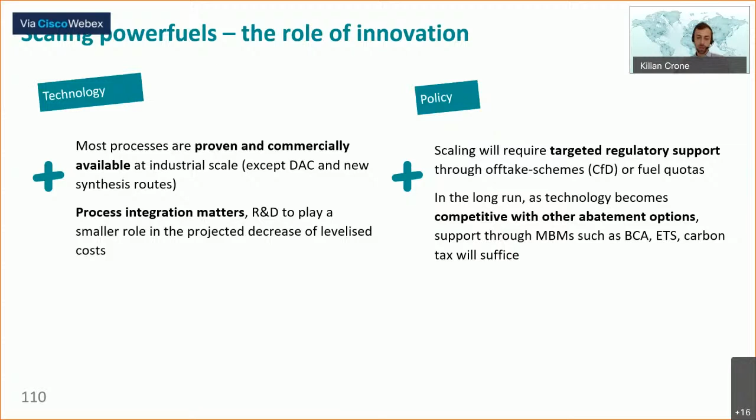Thank you, Fernando. Thank you, Kilian and team for the flexibility. This as an introduction has been quite good to show the broader landscape.

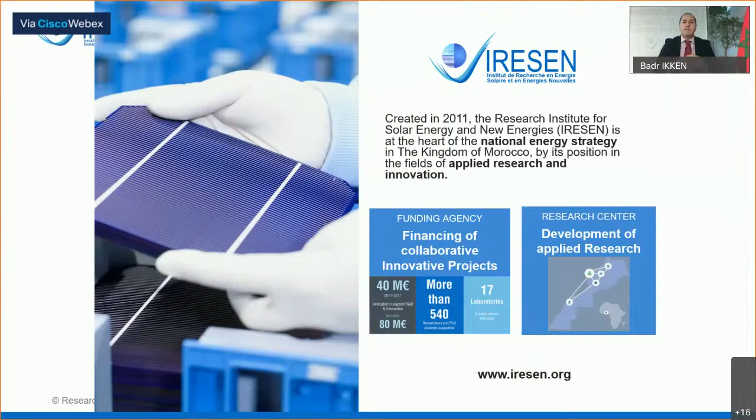I would like to introduce briefly IRESEN, the institution which I am in charge of. We are developing R&D, applied R&D infrastructures. We are a little bit like the Fraunhofer Society, and we have as well a funding agency for collaborative projects, and we will launch by the beginning of next year in January a call for proposals with different partners and countries, like for example Spain, especially for topics like hydrogen and e-fuels, and we are as well hoping to do the same with Germany, and we're in discussion phases to be able as well to launch joint calls to develop demonstration and pilot projects. Next slide, please.

As I said at the beginning, we are deploying a lot of renewable energy power plants, wind energy as well as solar energy. We started with CSP, concentrated solar power, and now slowly we are developing hybrid power plants including PV and CSP. I think in the next months we will see hybrid power plants combining wind power and photovoltaics. We have important renewable energy resources, with load factors regarding wind energy up to 70%. And as you followed in the last months, we signed an agreement with Germany regarding cooperation in the framework of the energy partnership, especially for hydrogen.

Morocco was identified as one of the countries with important potential to be an exporter of green hydrogen or other green derivatives. There are studies identifying Morocco could capture up to 4% of the global power-to-X market, and other studies which speak about 8%.

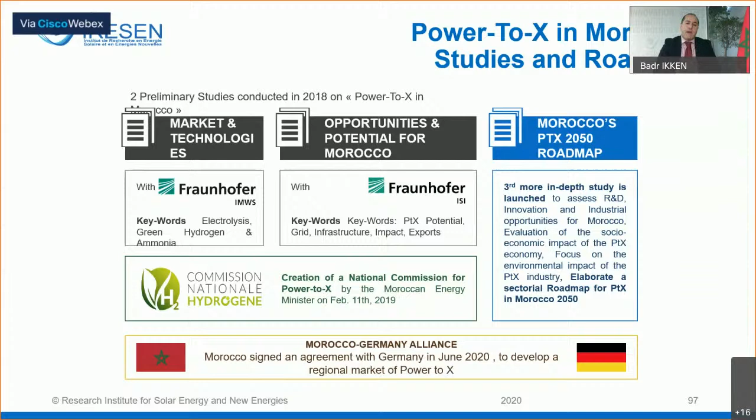Last year our energy minister set up a national commission for hydrogen, and we will publish our hydrogen strategy before the end of this year. As I said before, we also had the signing of the agreement with Germany.

Those are some first results, insights about the Moroccan strategy regarding power to X. It's clear that for the short term, ammonia will play an important role.

Why? Because we have a very important fertilizer industry in our country. We are one of the most important exporters of phosphates and different derivatives of phosphates. Ammonia will play an important role because today we are importing every year around 2 million tons of ammonia. It means we might be able to produce this ammonia ourselves, and later use all the existing facilities to export ammonia as well.

Other e-fuels will play a role, and we have a study now being conducted by Frontier Economics, identifying a potential to export other synthetic fuels, not for domestic use or need, but more for export.

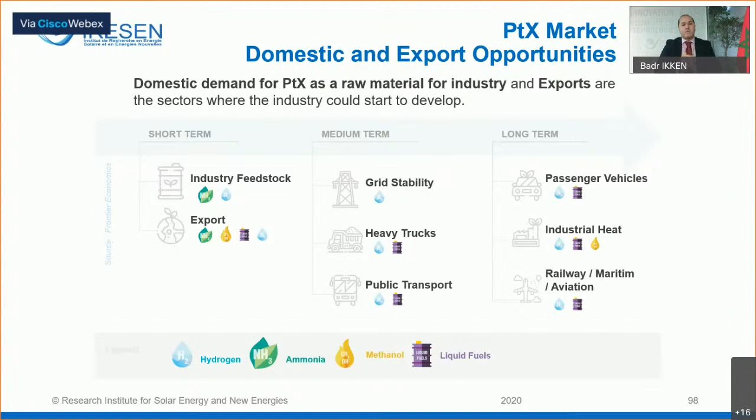This means that the projections for 2030 and 2040 regarding renewable energy installed capacities: for 2030 it might be up to 20 gigawatts, for example with 50% wind power and 50% PV. For 2040, it might be up to 60 gigawatts, and for 2050, up to more than 100 gigawatts installed capacity, to be able to produce what we need regarding ammonia, as well as to be an exporter to partners like Germany and other European countries.

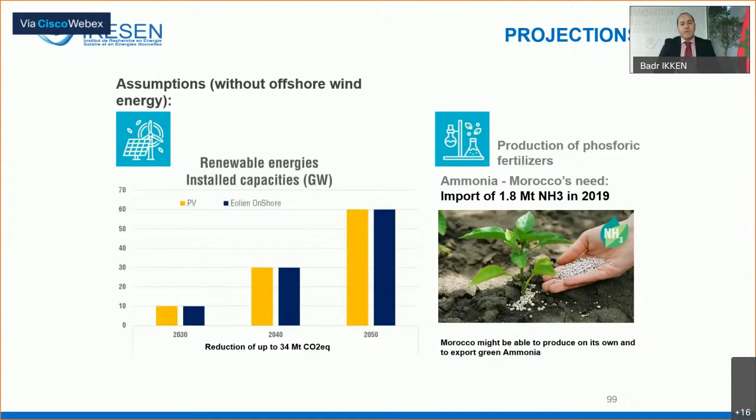This is why, in our strategy regarding R&D platforms, we are now preparing one new R&D platform called Green H2A, green hydrogen and applications. At the beginning we spoke about green hydrogen and ammonia; now we're speaking about green hydrogen and applications.

The idea is to have different steps, and this R&D platform, the Green H2A, will integrate different pilot projects in the middle. We are now in the selection phase for an industrial partner to develop this facility with different projects.

I will then give some information in the next slide about those projects. But here it's important to say that we will have a range of 5 megawatts regarding the production of green ammonia using different electrolysers, as well as the ammonia synthesis and production and power to liquid, production of synthetic kerosene and synthetic diesel.

And this will start by the beginning of 2021. In 2022 in Morocco, we will launch a reference project. It might be a capacity of 100 megawatts, and normally the target is to have it by 2024 for commercial use, as well as to be able to use it in the industry. Next slide, please.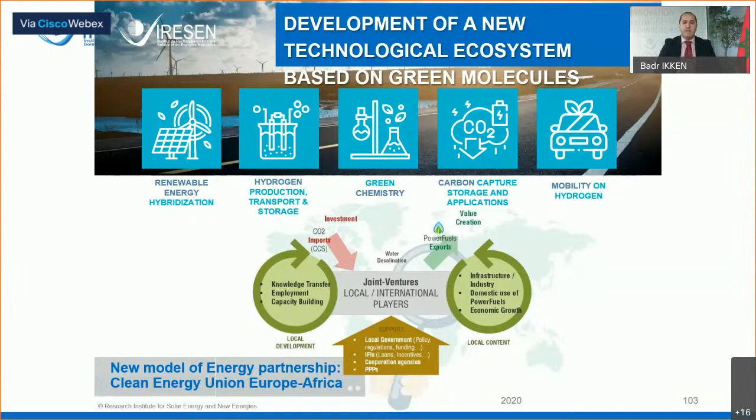Thank you, Badr, for that. I'm sure that your illustration is going to generate a number of questions. I have a few myself, but again, an invitation to all participating in the session to put your questions in Q&A. Quite interesting perspective. We've talked about the versatility of hydrogen, and naturally the question is, how do we make sure that going through that phase of integration and deploying the right infrastructure is not the break of this path of integration. So I'd like to turn to Karan.

Good afternoon, I think good evening in Australia, and hear your perspective from ThyssenKrupp as a provider and developer at the forefront of a lot of the technologies, the infrastructure and equipment that are going to be needed to hit those goals in 2050. So Karan, thank you and welcome. Thank you, Fernando. Thanks for a very warm introduction, and also a good lead into the topics that I will briefly touch on today.

As the title of my remarks suggests, we'll elaborate on 3 different elements of P2X. We will look quickly first at why e-fuels and what future they hold. What are the challenges to implementing Power-to-X? And then what we at ThyssenKrupp are doing about it, and how these solutions are being turned into our technology DNA. All of this in perspective of a place which is quite ripe for large-scale export, which is Australia, and that's why I'm here today.

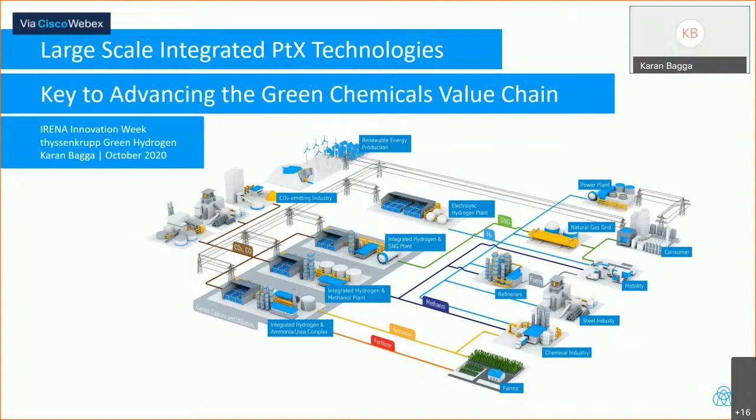So there will be a need to replace the existing fossil fuel energy sources with green molecules converted from renewable sources, no doubt.

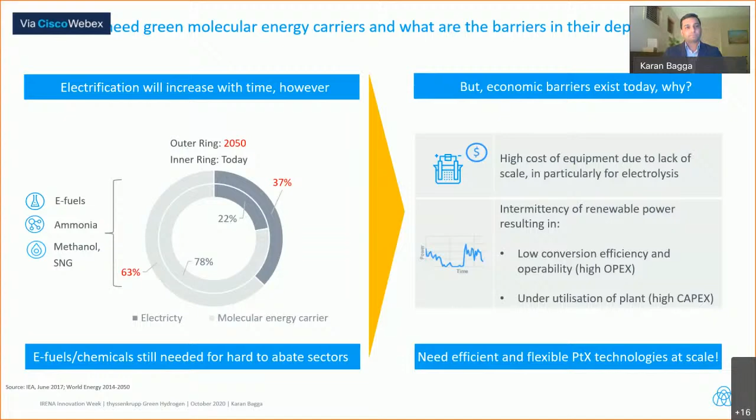So essentially, all that randomness introduced into the system gets imposed on the very first, critical part of the value chain, which in this case is electrolysis. We heard previously that electrolysis has to sing and dance according to the energy supply from the renewables, and that creates different harmonics of the randomness. Then you've got hydrogen storage to even everything out, because our last technology block, the chemicals conversion, likes to run in steady state. As much as electrochemistry likes steady state, catalytic chemical reactions even more so.

So how do we take all of that that's so random and turn it into something steady, and still come out at the other end with a credible business case? That's the challenge. In our view, there is a two-pronged approach. Just like with any other thermodynamic system, it's a case of minimizing the introduction of randomness, or entropy, and then once it's in there, mitigating it. So there are the two pathways.

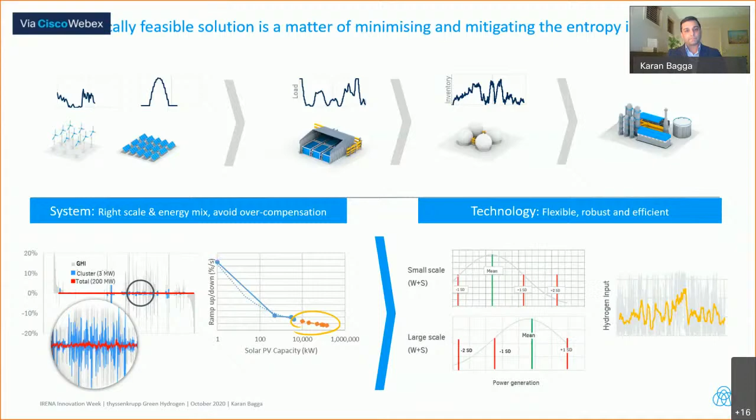We've got about a minute of your presentation. Yeah, no worries. It will only take a minute.

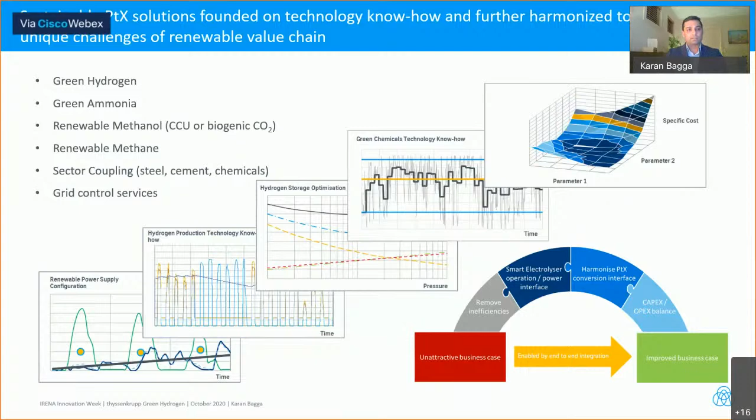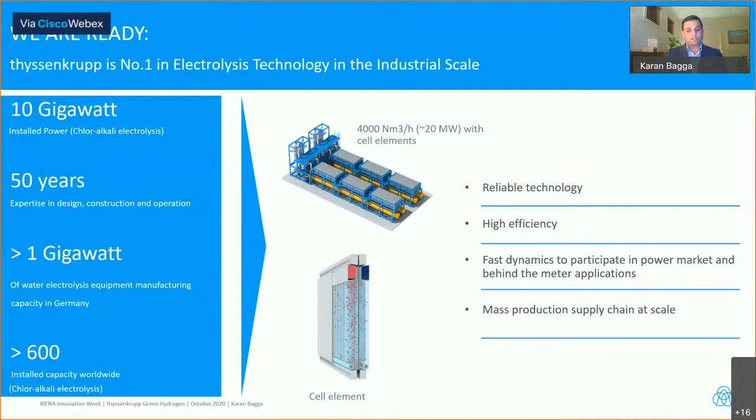And again, we have demo plants. Carbon2Chem, one of our pilot plant facilities in the Duisburg steel mill, has demonstrated since 2018 production of chemicals based on renewable power and carbon dioxide pulled out of the steel mill gases. So the message here is clear. Essentially what we want to say is that there are still hurdles and challenges remain.

However, smart technology, as well as having a view on the full P2X value chain, really chips away on the economic hurdles. So that's essentially the message I'd like to pass. Thank you, Fernando. That's great.

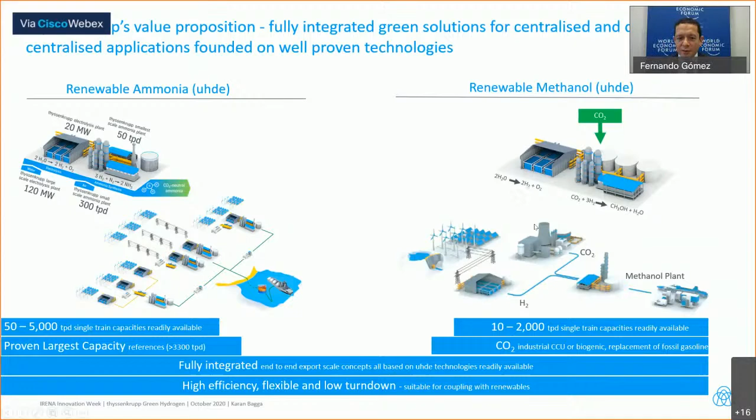The last piece of this puzzle is basically looking at the business side, the financing of this, and a bit of the risk that is perceived as a lot of these technologies evolve. So I'm happy to welcome Dan Feldman to share his perspective. What is missing to make this work? What is in the way of really allowing this integration to take place, especially for those who are making decisions on investing in these projects? So welcome, Dan, and thanks.

Thanks. So I'm a bit of an unusual presenter on this panel in that I'm a lawyer. I'm not an engineer, I'm not a scientist, but what I'm responsible for is helping projects in this area actually happen. And what that means is the rubber hitting the road on all of the technological issues that Karan and others have mentioned around intermittency and what that means in terms of trying to get a project structured properly, as well as the fact that, as people have said,

whilst we may all hope that one day ammonia is as tradable as oil, currently it isn't, and therefore projects getting done today at scale need to contend with the fact that there is no downstream market at the moment, and therefore they're trying to structure themselves in a way that persuades lenders and others that one day there will be a merchant market sufficient to take all of this quantity of product. And so that's going to take us into questions about how do we finance these things, how do we get them done, as well as how do we ultimately ensure that we have projects which are sufficiently well structured in order to make the industry happen, apart from the discussions about how it should happen by virtue of everybody's decarbonisation commitments.

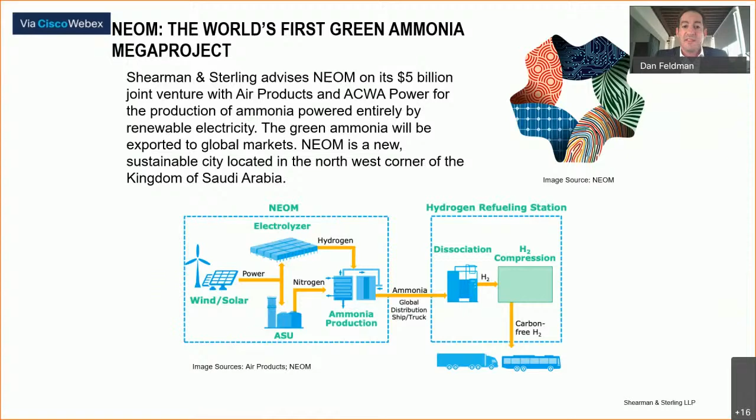So the project's scheduled to be on stream in 2025. So we're talking real time now. The project will include 4 gigawatts of renewable power from solar and wind. It will be the largest renewables project in the world. Just back to that slide, sorry. 4 gigawatts of solar and wind will be the largest project. Sorry, one slide before. Thanks. The largest renewables project in the world, apart from, of course, the novelty of being the first

green ammonia mega project. The electrolyser size will be 2 gigawatts, and it will produce 250,000 tonnes a year of hydrogen through the electrolyser, production of nitrogen by air separation, and ultimately 1.2 million tonnes a year of green ammonia. And all of that green ammonia is going to be off-taken under an off-take contract by Air Products and shipped around the world, where it will be, as I said, disassociated to produce hydrogen primarily for the transportation market in the first phase.

Next slide, please. So what I'm looking at when I look at a project like this is essentially, when you have a first-of-kind project with a new technology in a market that doesn't exist yet, and lenders are not familiar with it, how are we going to get this thing done? And I think the lessons that we learn on this project and the answers that we're developing for NEOM and the joint venture partners are going to be the key questions and answers that all of us are going to have to address when we move forward if we're going to scale up this industry.

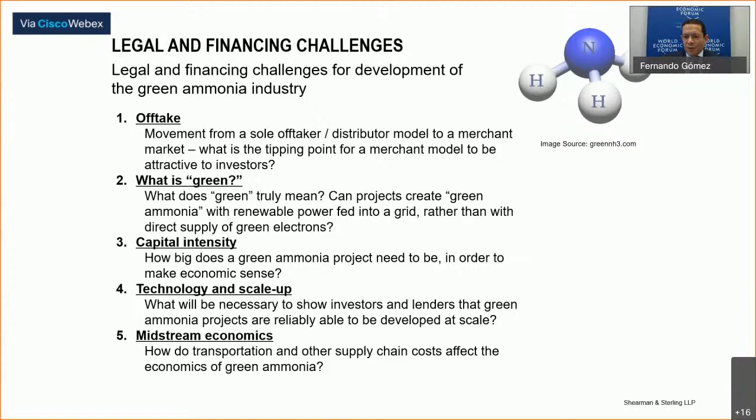We have about 9 minutes for Q&A, and I think what we've heard is a very good overview of all the different issues. There have been a couple of questions that have been put in the Q&A. I'm going to go very quickly to a couple of those, and I want to come back to all of you. What is that one thing that we need to think about removing from the path to this significant scale up? But let's go to the questions in the Q&A.

The first one was actually directly to Karen. Just asking for a bit more detail on the intermittency or the stability in the megawatt versus gigawatt scale that you illustrated. So just 1 minute to address that one. We'll come back to all of you.

We cannot hear you, Karen. You are on mute. Excellent. Thank you. I said I was going to take less than 1 minute, hopefully.

The megawatt versus gigawatt, there's no real set rules. I think it really needs to be looked at for site-specific conditions, essentially. But in our experience, definitely rooftop solar or that sort of stuff, where 1 or 2 megawatt type plants are considered, intermittency seems to be high.

But as you start to get to 20 megawatt, 30 megawatt plus, definitely hundreds of megawatts, you're already well past the point where the economics are going to get hurt, because we're going after every kilowatt hour of energy that's coming up. So I would say tens of megawatts versus once you get into hundreds, definitely you're past that. This is what we see in Australia anyway.